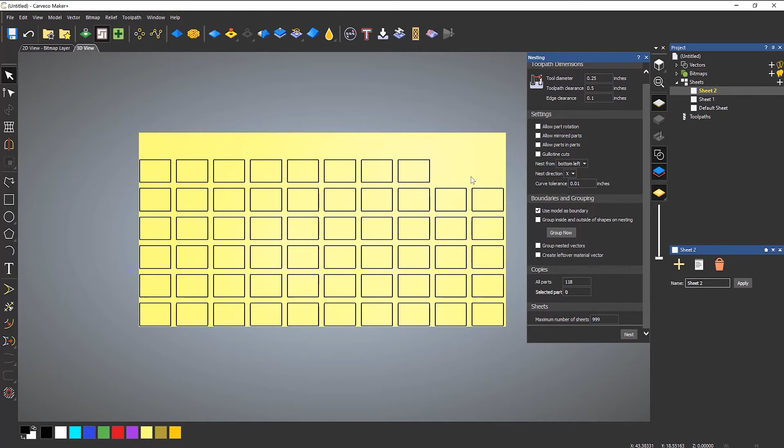Now if I undo that, and let's say I wanted 120 and nested that, you can see that sheet 1 has got exactly the same amount in there. It's got 2 copies. So if I make this a bit of a weird number, let's say 118, and nest that, you can see that sheet 1 is full, sheet 2, I'm just coming up to there, and I've got the 2 missing. Okay, if I go to the 2D view and zoom out, I can see all of the sheets. Okay, and I can switch between them like so.

Now, what if I had different parts? Okay, so let's undo that, and let's go back to the 3D view, and I'll just create, let's say, a star. Okay, like so. Okay, so let's say select all of those and all parts 118 still. Okay, select nest.

Okay, so what's happening, I've got 4 sheets, but I've got 3 copies of sheet 3. Okay, so sheet 1 looks like that, sheet 2 like that, sheet 3, I have 3 different copies of this because I want 118 of these stars. And then on sheet 4, I've just got that many stars.

Now what if I wanted, let's say, only a handful of these stars and a certain amount of the squares? Let's undo that. So rather than doing all parts, I'm going to put that back to 1. Okay, let's select the star. Okay, and I want, let's say, 26 of these. And you can see that the number on the inside of it changes to 26. So this is telling me it's going to do 26 copies of this.

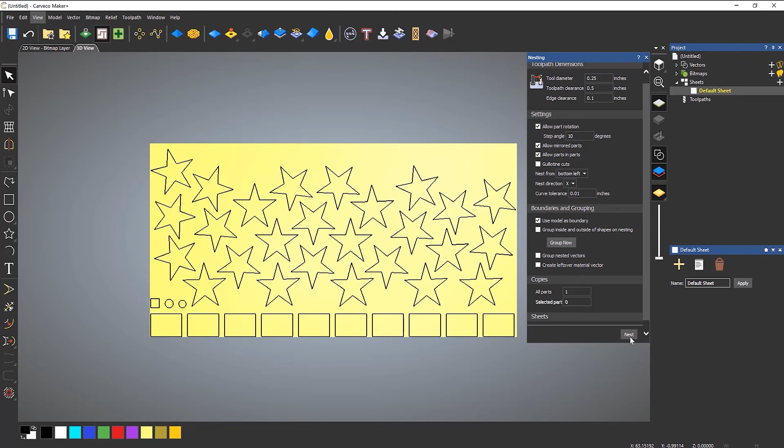Now if I were to try to nest this at the moment and select nest, what's happened here is that it's done what I've done previously, but it's also given me an extra square and two circles. So it's just nested those as separate entities, and it also hasn't taken into account that I want 26 of them.

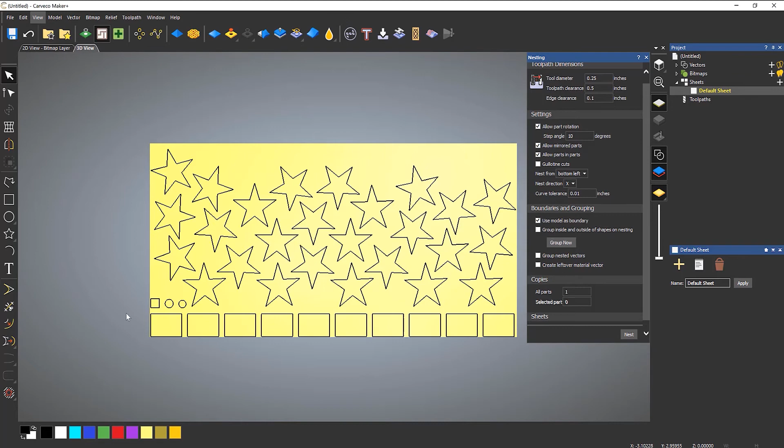So what I can do is undo that, select them all, and you've got group inside and outsides of shapes on nesting. If we try that and select that, what's going to happen is because you can see these numbers on here - the circles and the square only have one in there - I'm basically saying I only want one of those, so it's going to use that rather than the 26 or the 10.

So if I select nest, you can see it's nested those, but it's only given me one copy. So what I need to do is undo that, and the only option I have is to do all parts. If I were to say 10 and then nest, it will give me 10 copies. Now that's not really what I want to do - I want to create 26 and 10, and I can't do that at the moment.

So if I undo that, rather than group inside and outsides of shapes on nesting, I select them and select group now. What this does is basically just group them together, and then this allows me to select how many that I want.

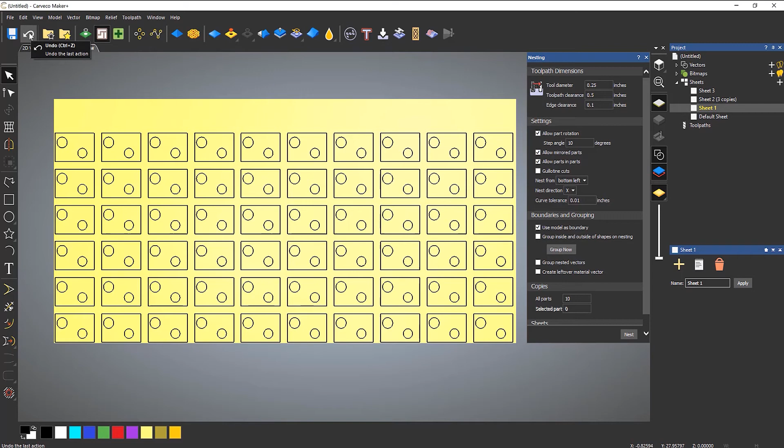So if I select nest, it gives me all of these sheets. Now that's not what I wanted. As I said before, you must watch out for this all parts option - that's actually a multiplier. So because I typed in 10 and 6, it basically times that by 10. So you can see that I've got 10 and 6, so it actually gave me 160.

So let's put that back to 1, and select both of those. Now if I nest, you can see that it's given me 6 of the rectangles and 10 of the stars.

Now you can also group these afterwards, and you can also create a leftover material vector. So what this does is basically give me a vector going around the outside of this that I can save.

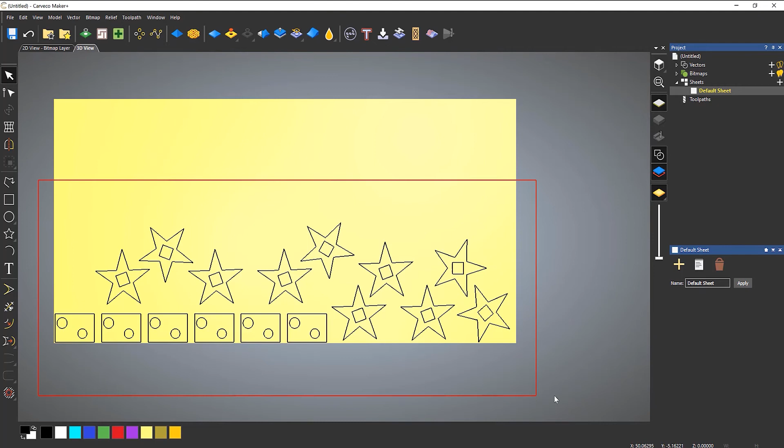Let's do more of a real world example now. If I close this, let's delete all of those parts. So let's take a look at the top under Untitled, and you can see that I've got a 2x4 sheet.

Now I've got a drawing that I created of basically some end panels for a synthesizer that I've done. I've just done them out of 1/2 inch plywood.

So what I'm going to do is bring those in, but they've also got layers with them. So if I go to vector and import, you can see that I've got this file, which is a DXF file. Importantly, I want to preserve the layers. Select open, and that will give me the layers that were created with this. I'll just center that in the model, I'm not too fussed about that.

And specify the units that the file was created in. This was actually created in millimeters, so it's automatically going to convert this for me and put it into inches, so it's the right size for this. I know that it was done in millimeters, so if I select OK, you can see that it's brought these end cheeks, or these end panels, into the software.

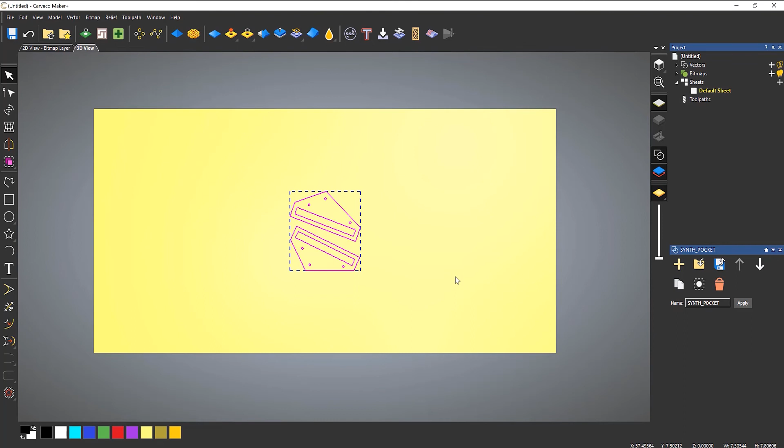Now if I deselect those and zoom in, you can see that they're different colors. If I open up the vector layers, you can see that I've got a synth pocket, I've got 5mm holes, and I've got an outside profile.

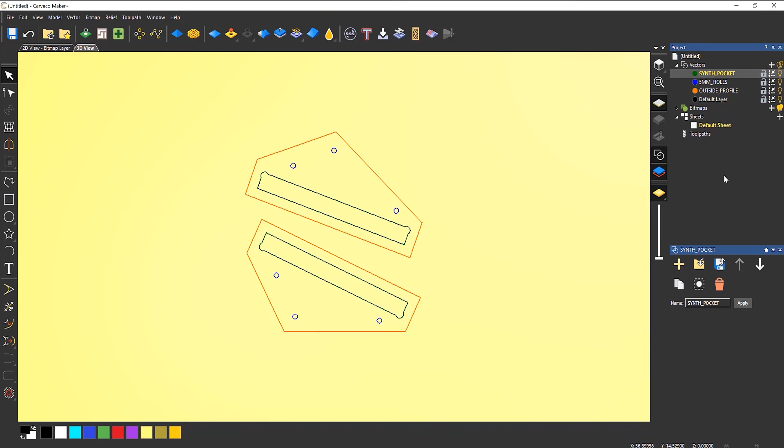Now what I want to do is machine these out of this sheet, but I thought to myself, well, I can make a few copies of these and maybe sell them. So I'm going to try and get as many copies as I can out of this sheet. What I'm going to do is select all of those and go to nesting.

Let's use the same tool diameter. Let's maybe give it a 1 inch clearance, and let's give it 1/2 inch edge clearance. I'll allow part rotation of 10 degrees, allow mirrored parts, and just for the sake of it, allow parts in parts.

Use the model as a boundary, and what I'm going to do is select group now, because I want to group these right now so it saves the layers afterwards, and it will also group all of these internal parts to the boundaries. So if I select group now...

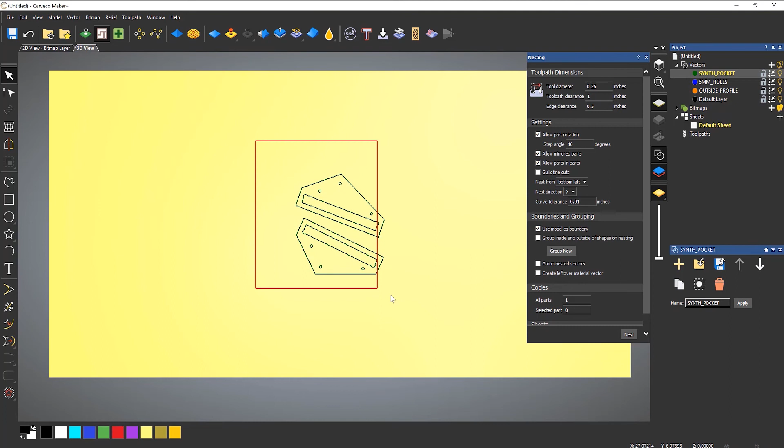And then select them, and I'm going to do all parts. Let's just say 100, because I want these to go over the whole of one sheet. I'm just going to machine one sheet. Select nest, go back to sheet 1, and you can see that I've got all of these parts.

Let's select all of them, and I'm going to select ungroup all. And then you can see that they've all been put back onto their original layers. So you need to select them and select ungroup all.

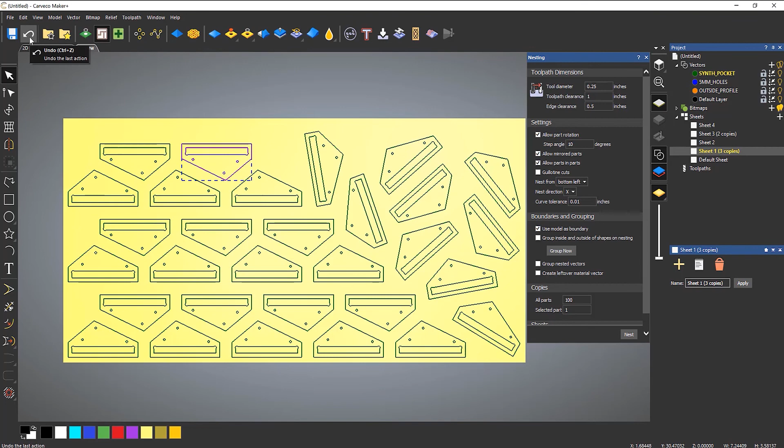Now I'll do that again because I want to change the spacing on this. If I undo that, I'll go back to there, and you can see that they're still grouped together. Now let's change the spacing, let's change the toolpath clearance. Let's say I want this to be 0.25, and the edge clearance let's do that 0.25, and then nest.

Now I can choose which one I want to use. So let's say I could use that, use that, use that. That one looks as though it's being utilized probably the most to my eyes, but it's probably just exactly the same. So let's say that I wanted to use that.

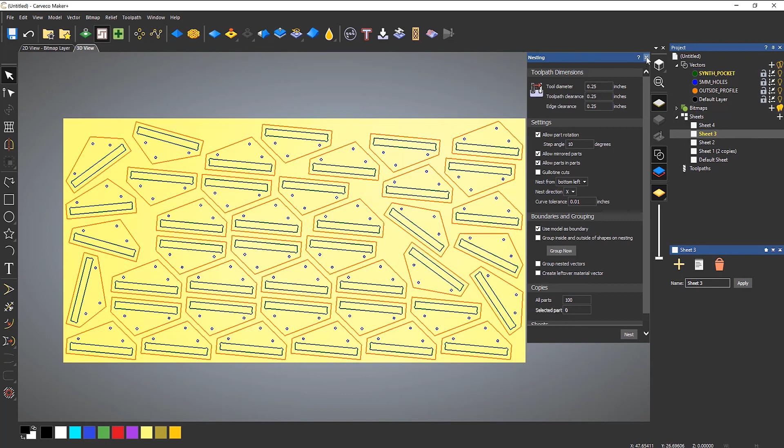So what I can do is select all of those, right click, and then I need to ungroup all. And then that puts them back onto the original layers. So now if I close the nesting tool, what I can do now is start machining this.

I'll just do this really quickly over, let's say, the pocket that I have here. So if I go to toolpaths and then do an area clearance, rather than selected vectors, I want to do this over a layer. So if I go to the synth pocket, finish depth...

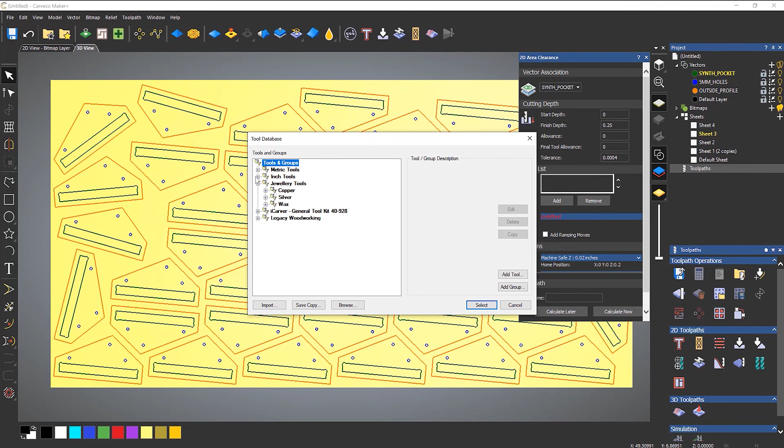Let's just make anything up for this, let's say 1/4 of an inch. Add a tool, let's use a 1/4 inch end mill. Click select, offset. Now I'm not too fussed about this, this is just so you can see what happens. Set up my material, let's say that it's 1/2 inch material.

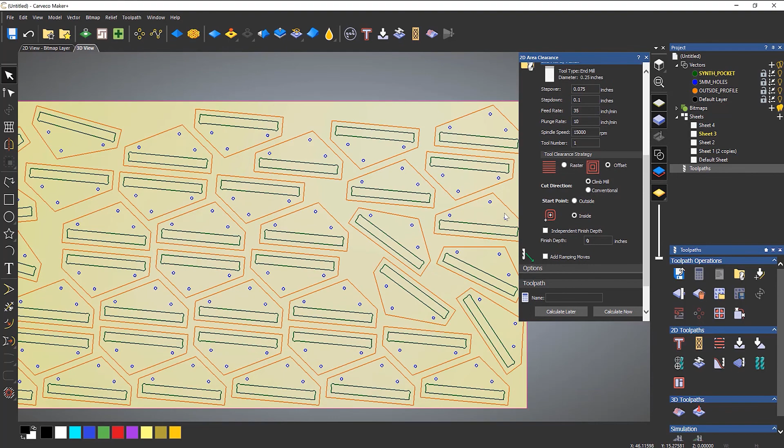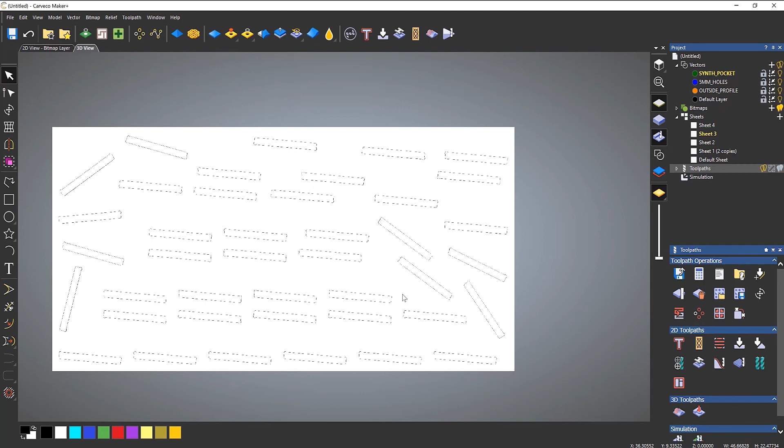And let's calculate that, and you can see that it's machining over the whole sheet. I haven't had to select these because I selected the layer rather than the vectors. So if I were to simulate that now, you can see that it's created all of those pockets for the synth. That's how the nesting works.